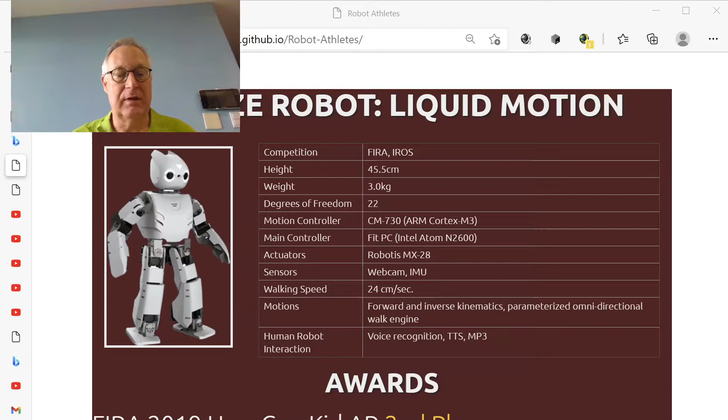And, yes, I should move myself to there. We won second place in the HuroCup all-round competition. I'll go into more detail about that competition and what the robots have to do, in 2019, which was a good success for us. Okay, that's not so good either. Maybe here.

Our next larger sized humanoid robots are the Robinion robots. They're 80 centimeters tall, 7 kilograms, with 26 degrees of freedom. The special thing about those robots is that they use a parallel kinematics design to make the legs lighter, so there are actually no servo motors in the knee joint of the robot. They're placed in the ankle and the hip, but then you have to double them.

These robots won first place at the HuroCup competition and also did well in several other events. We also have a 1.3 meter tall humanoid robot, 12 kilograms with 20 degrees of freedom, which is specifically built for the RoboCup soccer competition.

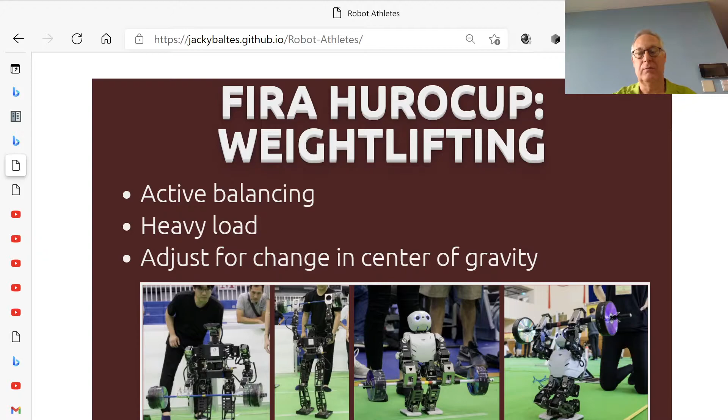One of the events at the FIRA competition is the weightlifting competition. Similar to human weightlifting, the humanoid robot has to carry a heavy load. However, we did not just want to test the shoulder strength, the strength of the shoulder servos in the robots, so it's actually more of a balancing competition.

We have the video here. The robot first needs to walk up to the bar. Now these robots are all real robots. They are fully autonomous, not remote controlled by humans or anything like that.

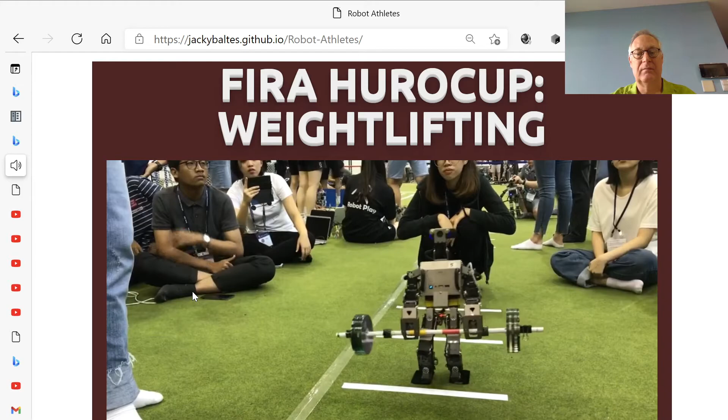Once the robot positions itself so that it is able to pick up the bar, it then needs to walk to the third line from there. Now with one foot touching the line, the robot needs to lift the weight above the head.

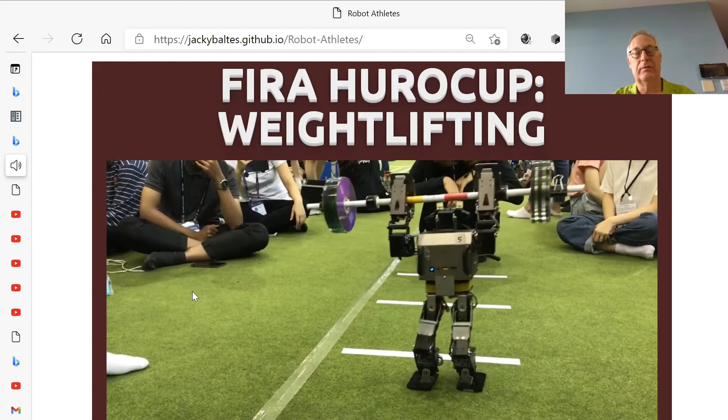This is where the balancing comes into play, because for the first 50 centimeters the center of mass of the robot is very low, so it's a very stable walking gait. Now the robot has to be able to compensate for the shift in the center of mass, so now the COM is much higher, and you can see the walking gait has changed. It needs to be able to compensate for that.

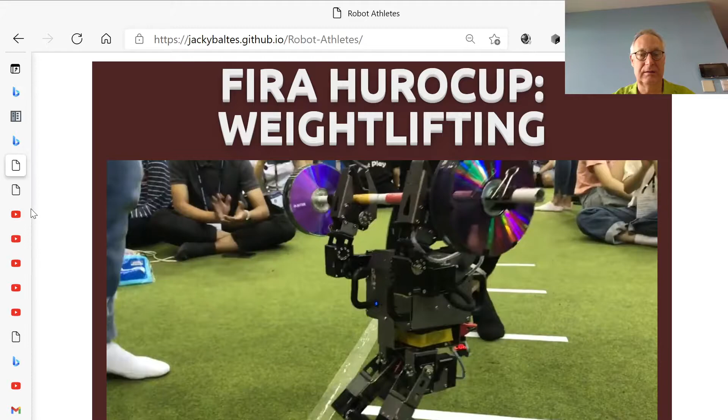Next, the sprint. One of the nice things about using sports is that it's very easy for people to understand the point of a competition. I already talked about the sprint before, and each and every one of you understood that the idea is to run as fast as possible for a short distance. You may not have known whether it's 2 meters or 3 meters, but it was clear there was a short distance. And we can see what capabilities of the robot we're testing in this scenario.

So let's have a look at the sprint. We will start the sprint final in 5, 4, 3, 2, 1. This was the FIRA 2017 competition. One of the robots did a false start, so they had to be pulled back, everybody. So in a sense, it's just like the Olympics - the atmosphere is very electric, people are very nervous.

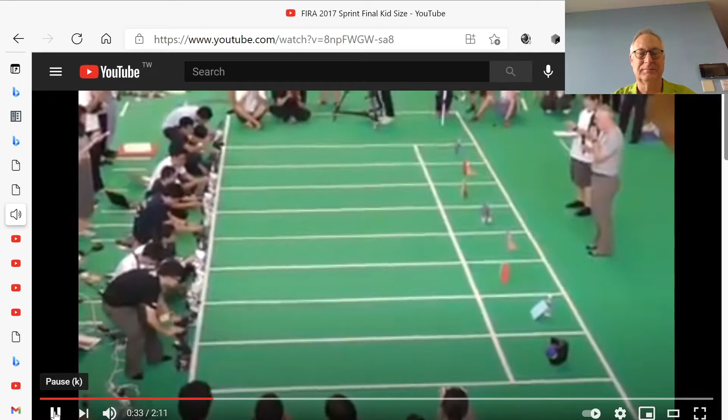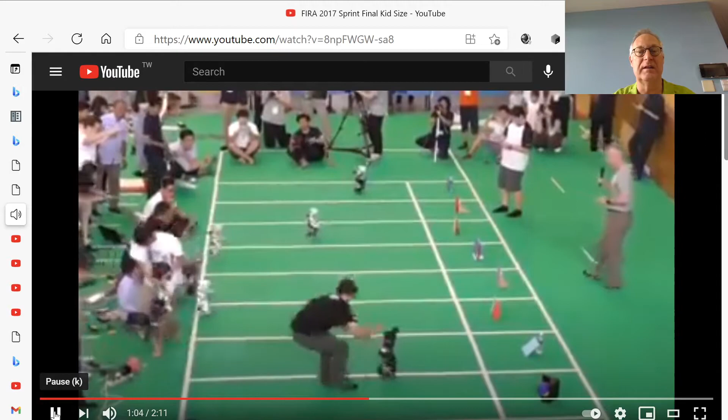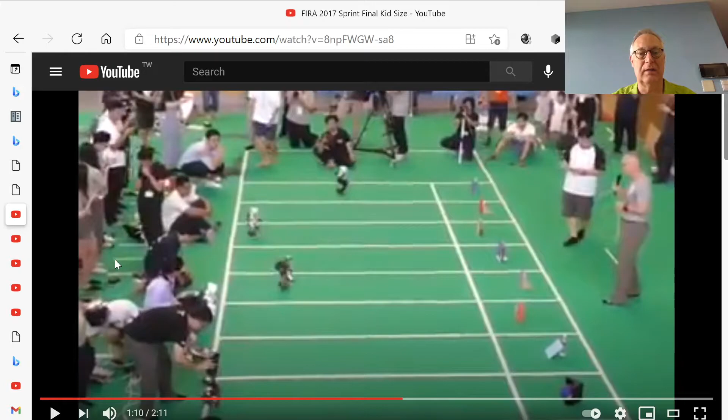Another good thing about using robot sports as competitions is that we can track progress. You see the robots here from 2017. The world record in 2015 was about 52 seconds, and then in 2017 the record is 26 seconds. Even in just 2 years, you can see how much the technology improved, how much faster the robots now are compared to just 2 years ago.

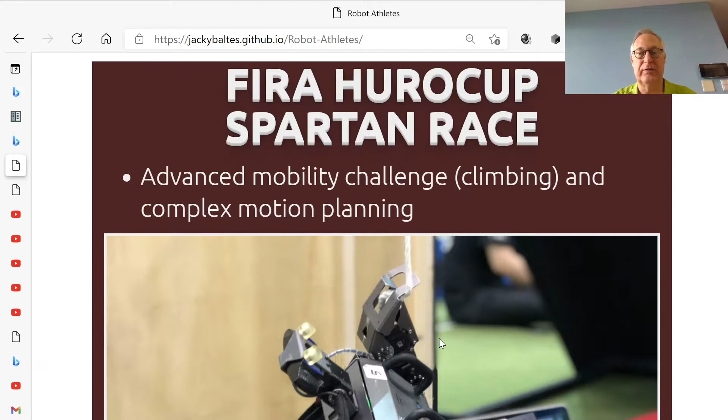We have the Spartan race. This is an extreme mobility challenge where the robot has to climb a rope and climb a ladder, and that challenges the motion planning, because for climbing the ladder, the spacing of the rungs is not fixed, so the robot needs to be able to see where it can reach and which holds are stable, and then plan a path through there. So this is not something that you could pre-compute with a set of parameterized motions, because there's just too many variables.

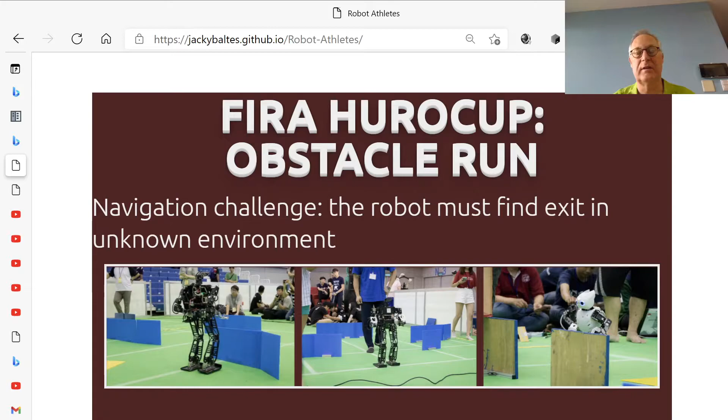The obstacle run is a navigation challenge where the robot needs to find the exit, needs to map its environment and then walk through. The marathon, in contrast to the other robot competitions and the other HuroCup events, is always held outdoors, which makes the vision problem a lot more challenging. The robot has to follow a path which is indicated by the red tape - actually, it can be any color tape.

Also since 2019 there are markers, so there's a right arrow, a left arrow, and a straight ahead arrow. The robot then has to walk for 425 meters, which is exactly 1/100th of the marathon distance. When we started the competition, the distance the robots had to walk was 42 meters, because that's how far they could walk in an hour and a little bit of time. So again, you can see how much the robots improved.

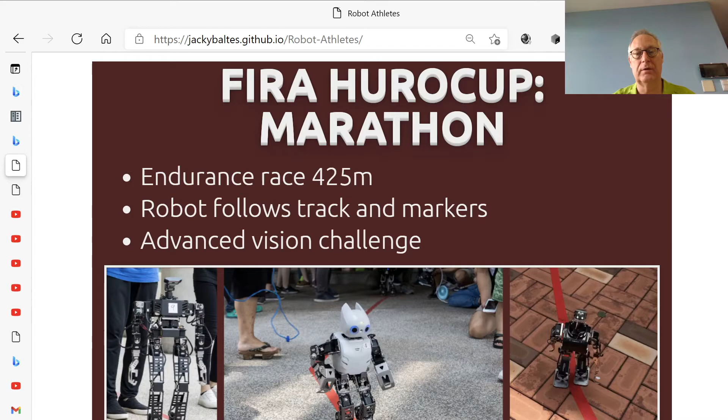We have a triple jump, which is a highly dynamic motion, where the key aspect is being able to synchronize all your motions, so all the joints are using full torque at exactly the right time, and then you need to be able to land.

That's quite an interesting challenge. In particular, when we started it, we built the playing field for a maximum distance we expected of sort of 20 centimeters, so we built it for 50 centimeters. Then one of the teams showed up and jumped 80 centimeters, so they jumped out of the stadium. We had to reconstruct the stadium for the next year.

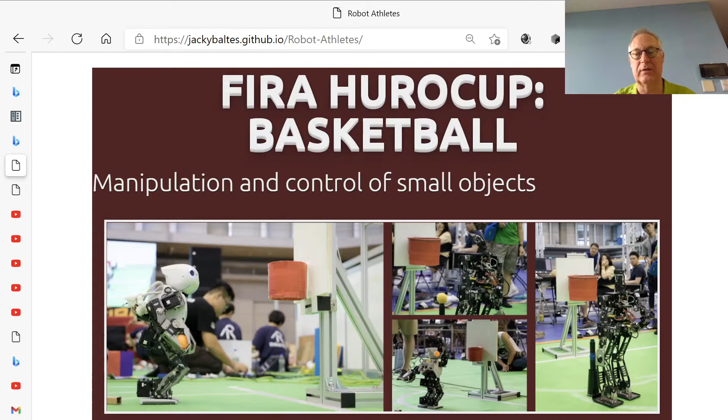Basketball - now it would be really cool to build a robot that can dribble a ball, but that's not really possible with the technology at the moment. So the robots for basketball are mainly dunking and throwing the ball for 3 points, 1 point, or 5 points. There are 3 different circles - how far away you are from the basket determines how many points you score.

Archery - we have a moving target, and the robot has to hit the target. This is actually an interesting problem in motion planning, not because of huge variety of motion, but because of the high precision needed to hit a target.

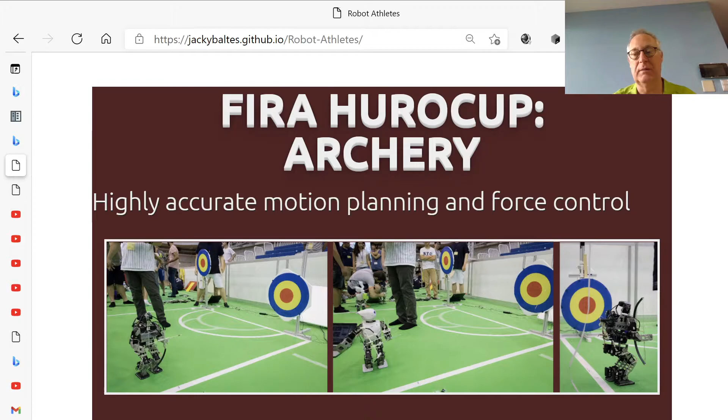With our largest humanoid robot, the Thormang, we are actually trying to qualify for the Taiwan national archery competition and for the Olympics. The goal was 2020, but because of COVID it's now delayed until 2021, and we were slowed down as well, so we hope to compete in an Olympic archery distance event in 2022, next year.

Here's our archery robot shooting 15 meters. Shooting. You can see it's quite accurate there - over 15 meters we are quite accurate.

Mainly it's due to our detection of the target, which is quite stable. We use a histogram of oriented gradients for detecting the target, and then train a classifier using support vector machines in order to classify targets.

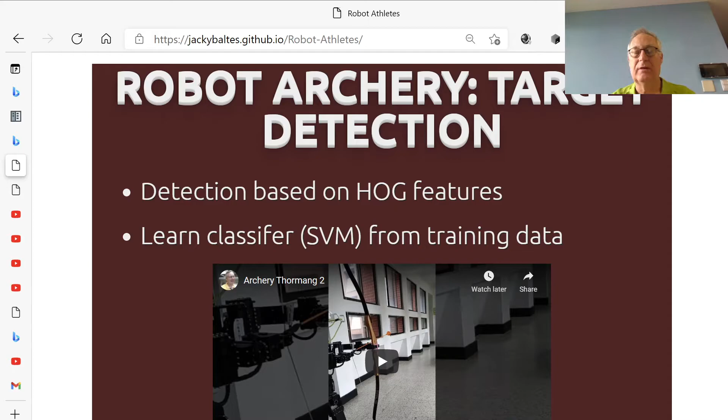Now, the sports events as a quantitative evaluation of robot performance are very good. For human-robot interaction, however, it's hard to come up with a quantitative measurement.

Since 2017, I've thought that a lot of AI research hasn't focused enough on attention, because attention is crucial to human intelligence. For example, deep learning systems at the moment look at the image as one shot, and then we expect it to spit out everything in the image - whether there is a cat in the image or not. But human visual perception doesn't work like that at all.

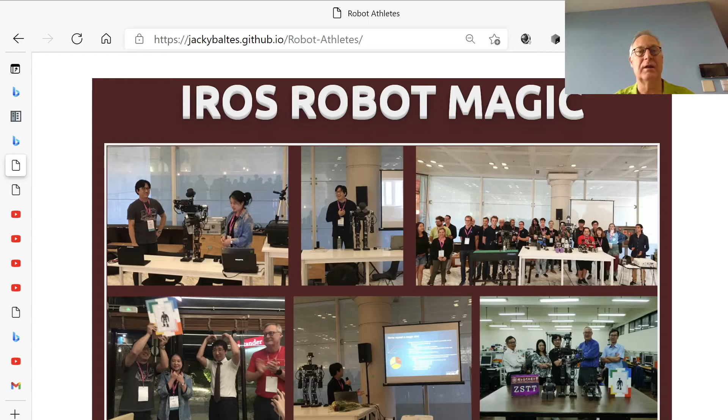So we came up with the idea of the Robot Magic Show, which we usually hold during IROS conference, the largest robot conference for researchers. I like magic as a testbed for human-robot interaction, but also because magic is all about misdirection of attention, right? I want you to look here, and this is where the trick happens.

So here are two of my favorite magic tricks with our robots.

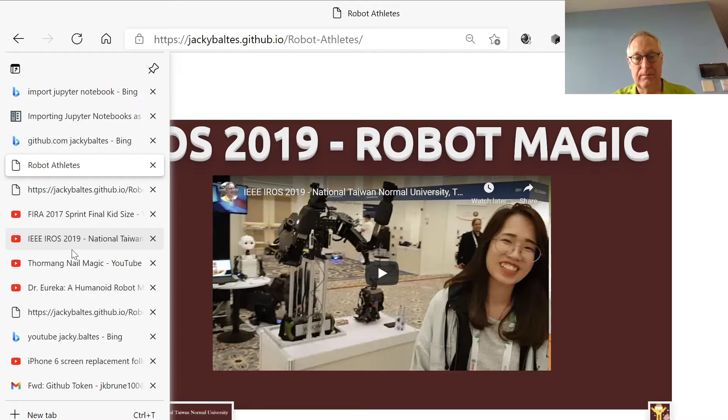So this is a nice psychological trick. The robot gives a coin to the spectator. The spectator has to put the coin behind their back and then put it in either the right hand or the left hand. Then the robot asks you and tries to guess whether the coin is in the right hand or the left hand.

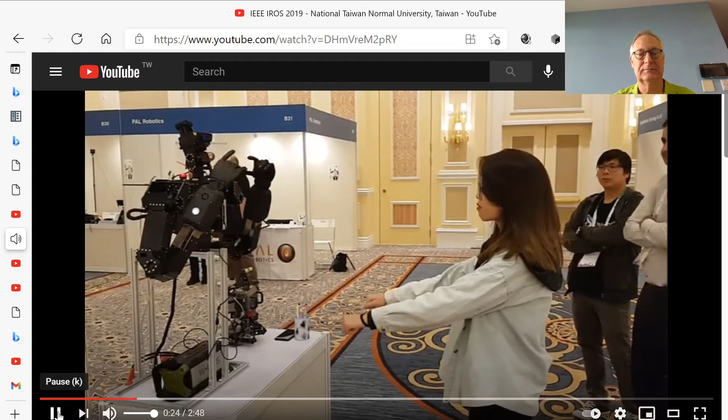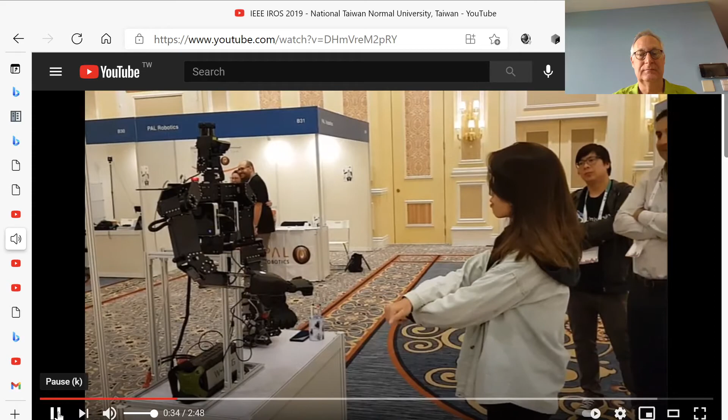So this is actually the part where the trick happens. The robot is trying to look for cues. Some people claim that you twist your head slightly in the direction of where the coin is not, or that your eyes flicker. Those will be very difficult to detect using the webcam that we have mounted on the robot.

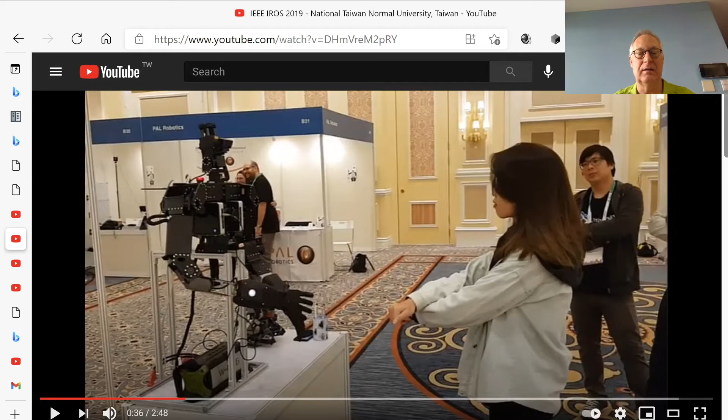And even though we're training on that, if these hints are not conclusive, then the robot is asking you to cross your arms. For most people, we're more than 80% accurate with this: if you ask them to cross their arms, then the coin is in the arm that is below. People are trying to hide the coin subconsciously.

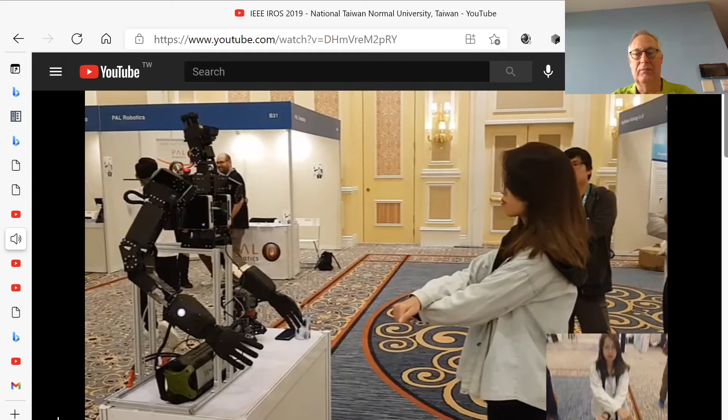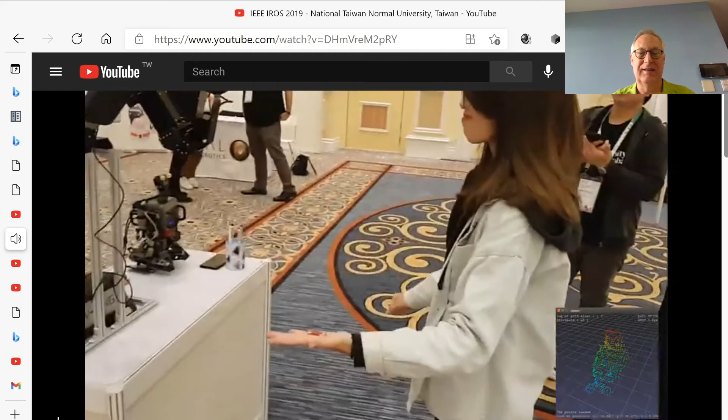Now, being able to detect which arm is on top is easy for humans, but we tried it for about 6 months and it's actually quite a hard problem. So we finally ended up using the laser scanner. We wish we could have just used the camera itself, and we're still doing research trying to improve detection using the camera.

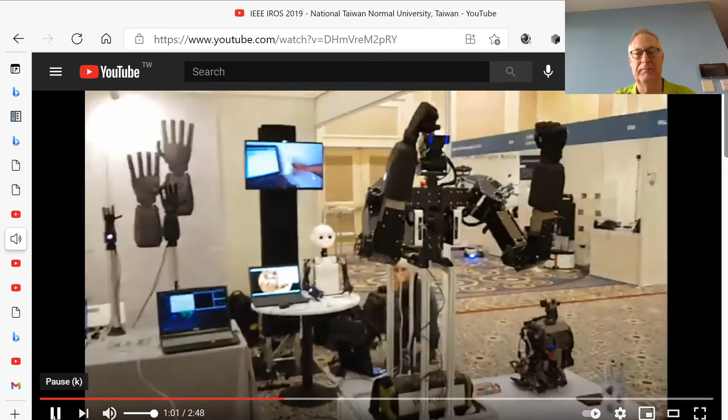Now you can see here the output of the LiDAR scanner and what the robot actually predicted. So here's the point cloud of the person. And here's the same trick during the official competition. Put it behind your back and hide.

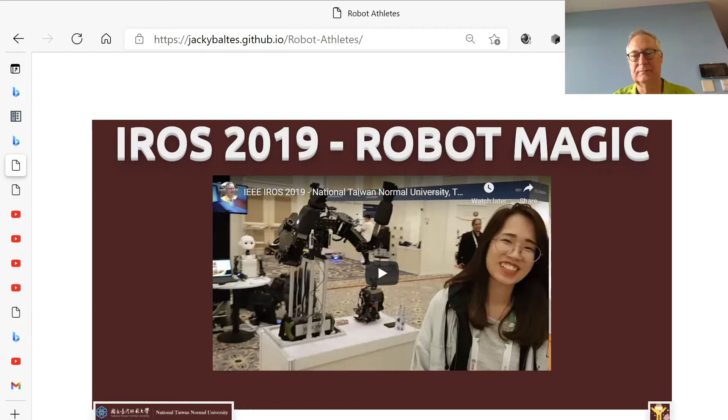I also like the next trick, which is a nail trick, so it's more dangerous if we do it wrong. I, in particular, would be injured. So there's this extra element of danger. The trick includes some comedy, since I assume most of you are able to speak Chinese, you'll be able to understand it. But the whole trick is sort of based on the fact that I'm unable to speak Chinese.

So we're pretending that the students are trying to trick me.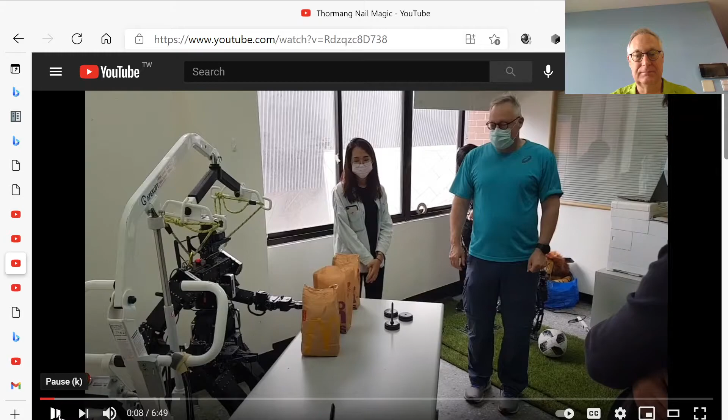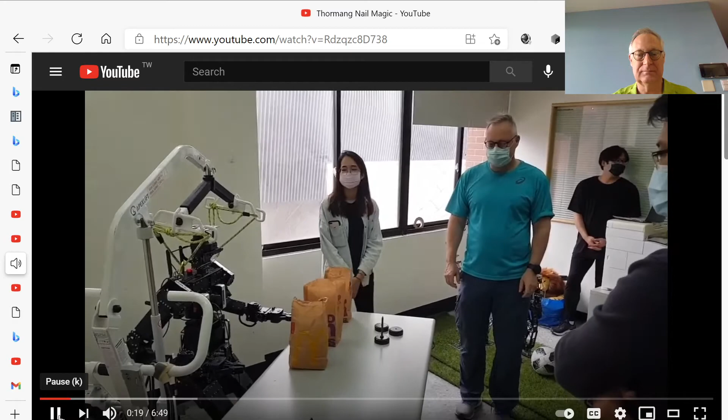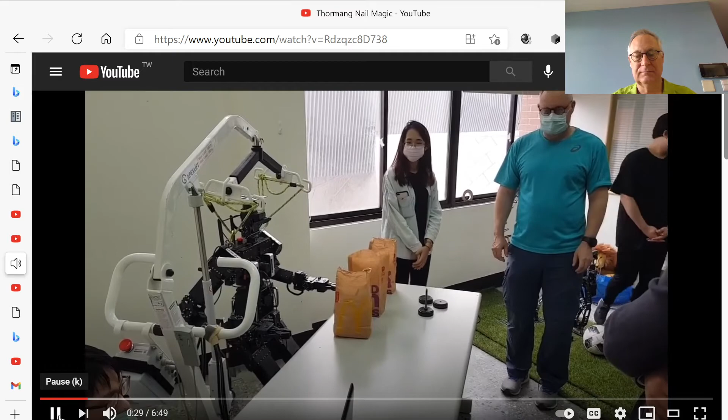Welcome everyone, I am Thormang. Today I am going to show you a magic trick that I have learned recently. As you can see, there are 3 paper bags in front of me. Later, I will put this wooden base with a sharp nail into one of the paper bags, and then swap around the position of the bags.

To make sure we won't find out the bag is empty by feeling the weight, I prepared 2 wooden bases without nails. Student, please help me put these 2 wooden bases into 2 paper bags and close them.

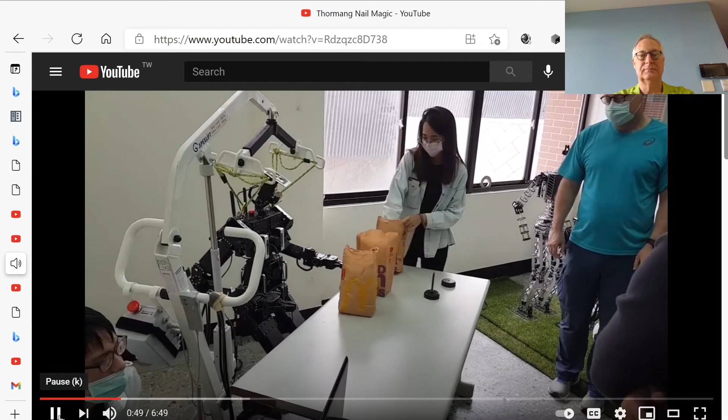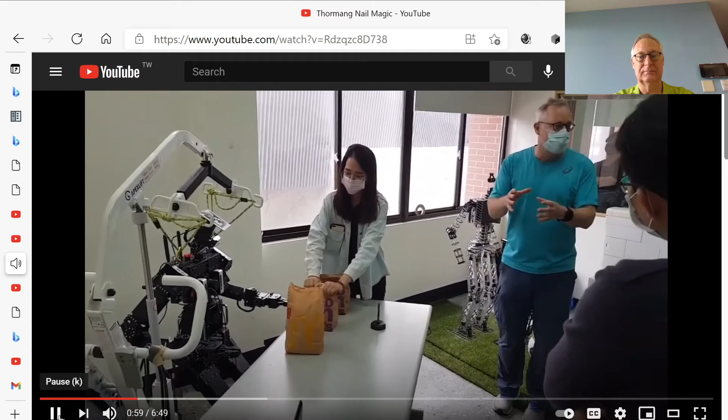So our research goal here is detection and manipulation of soft, deformable objects, because the paper bag is not solid, so you cannot just squeeze it.

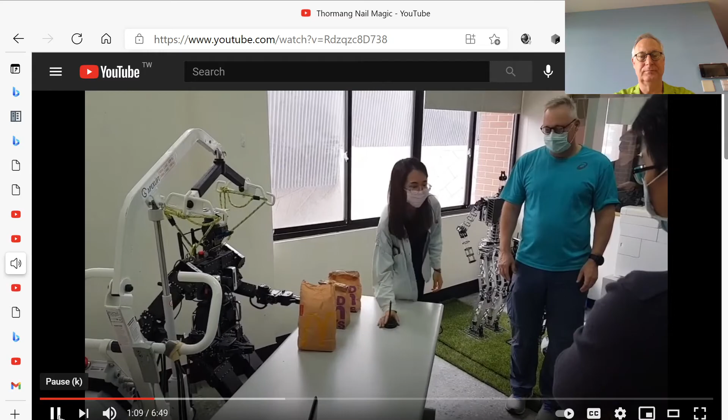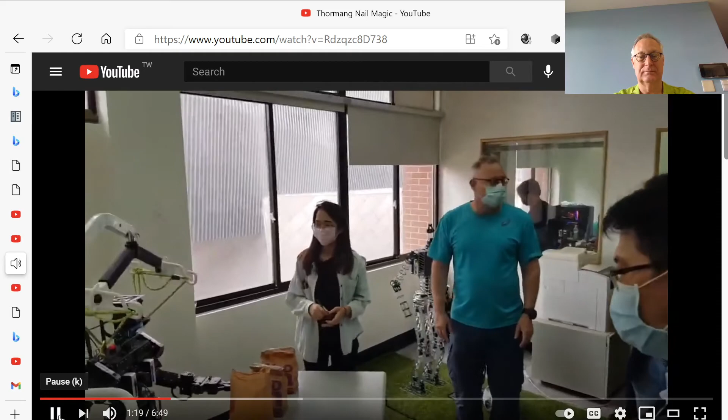Student, please ask an audience member to examine the nail and make sure it is real. Now you can check. So, audience volunteer, can you confirm to the rest of the audience that the nail is indeed real? Okay, thank you.

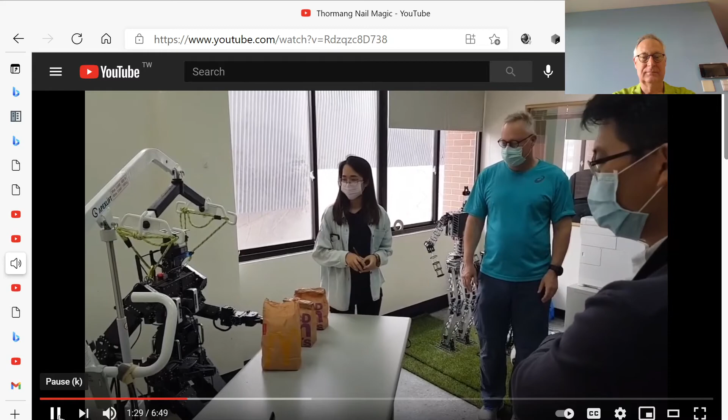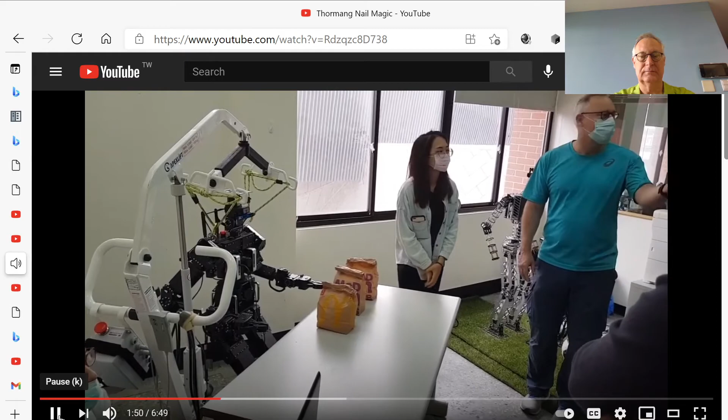Student, please place the nail inside the last bag and close it. And everyone, please pay attention and remember which bag contains the nail. Now, I need another volunteer. Any volunteer? Thank you for volunteering.

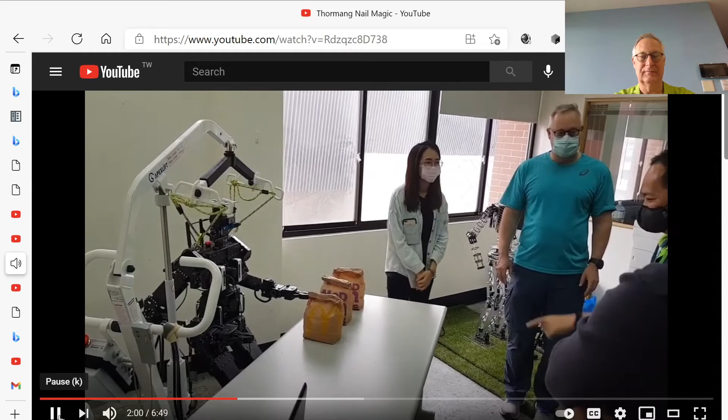Now, do you remember which bag contains the nail? So this is important now. So the bag with the nail is the middle bag, right?

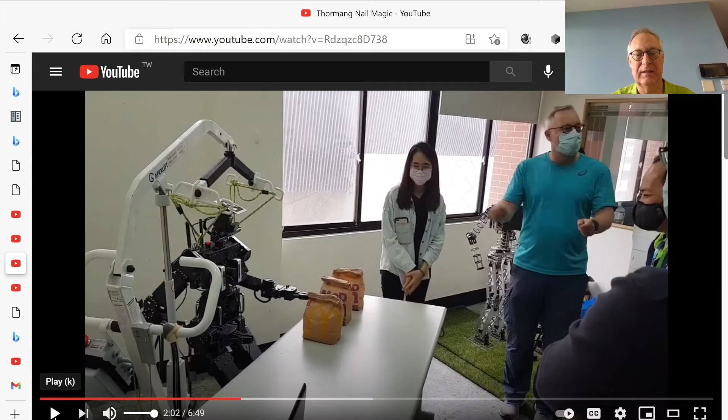We're going to shuffle them, but the robot, because it has very fine vision, it can detect where the bag is basically.

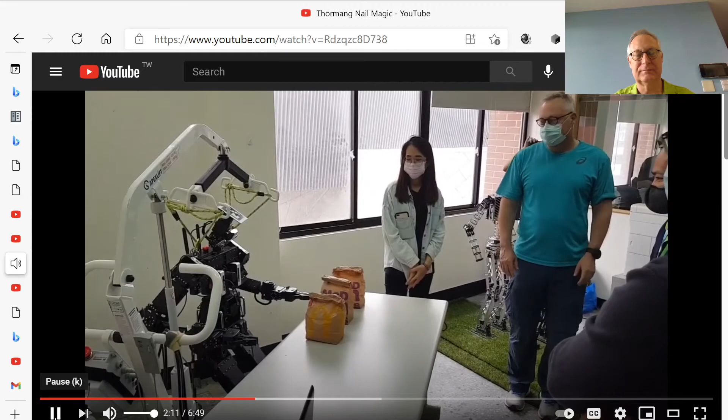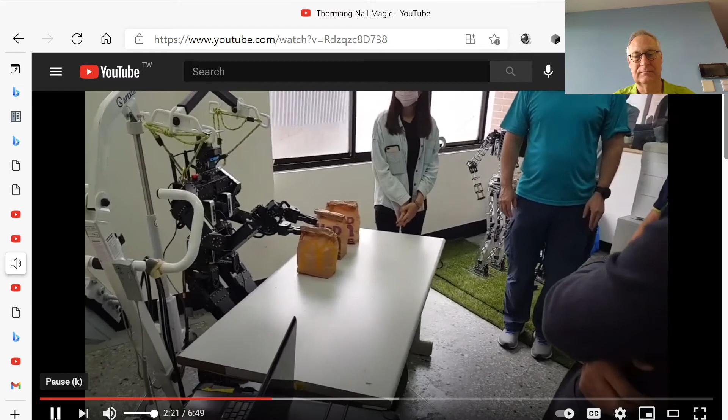You mean this one, right? To make sure that I won't be able to know which bag contains the nail, the student will start swapping the bags around. When I say start, the student will begin and volunteer, you can shout out stop any time you want. So you just need to say stop. Let's start. Stop.

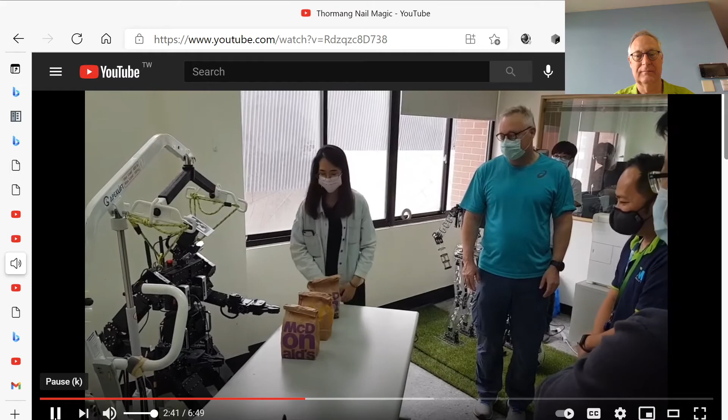Okay, now I need some time to feel where the nail is.

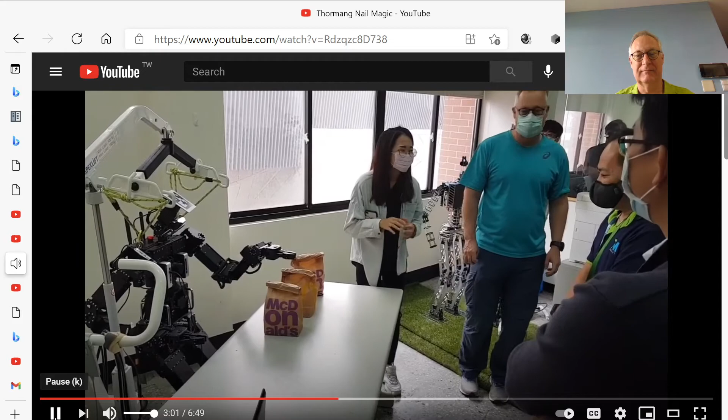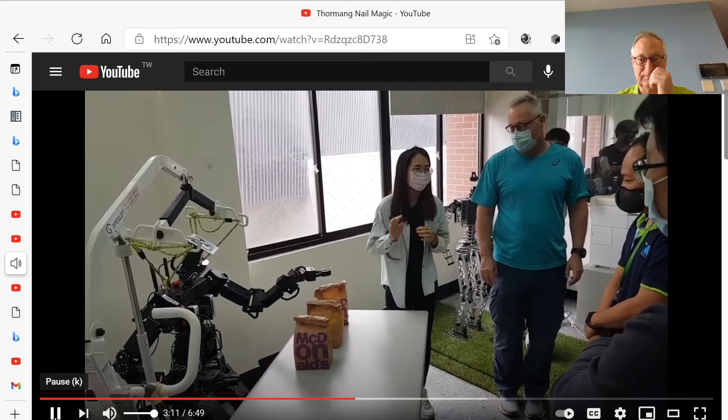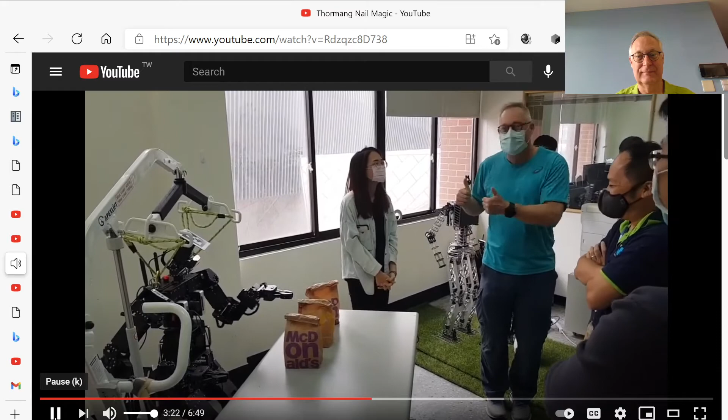Everything okay? Oh, I am 100% sure where the nail is.

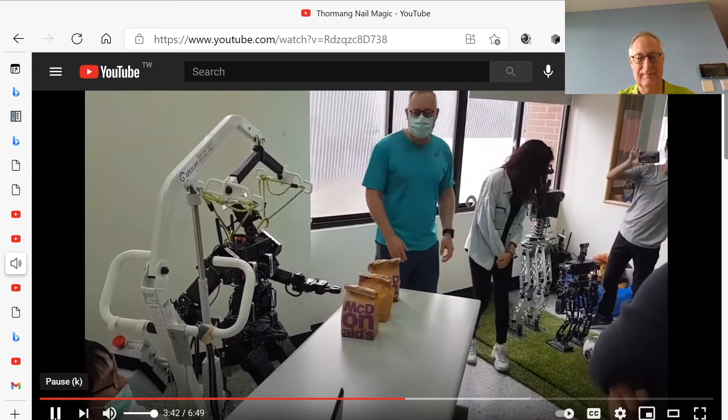So I would like to play something much more interesting. Jackie, as the supervisor of your lab, do you believe in my talent and your students' ability? Not so much my students' ability, but their hope to graduate, I think. Oh, I am happy to hear that.

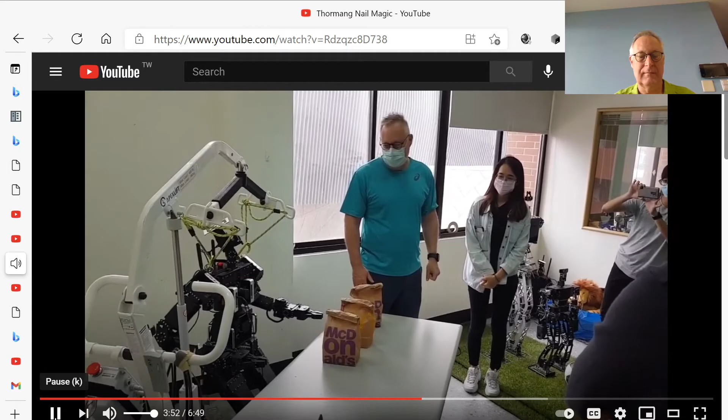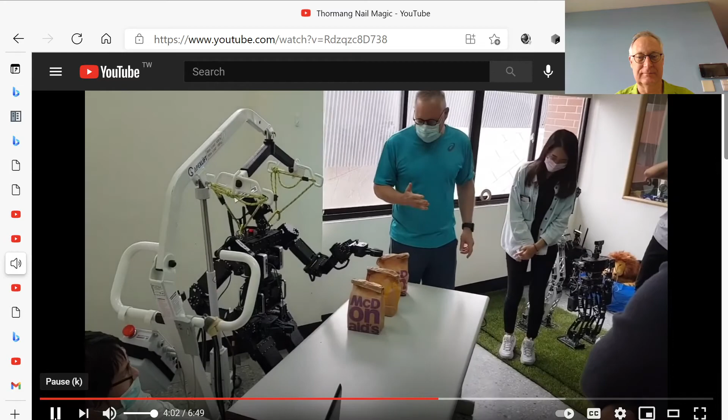Since you trust us so much, we can raise the stakes. How about we use your hand to press down on the paper bag? What? I'm not so sure about that. It was supposed to be Green's hand, not my hand. Please give me your hand, Jackie. Okay.

Volunteer, choose a bag you think there's no nail inside. Left, right, or middle. Choose wisely.

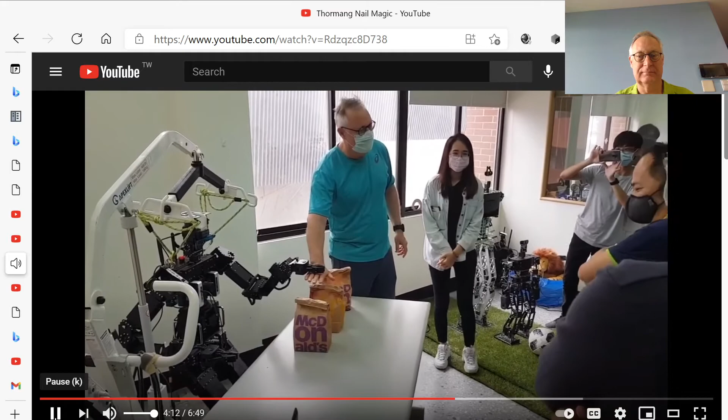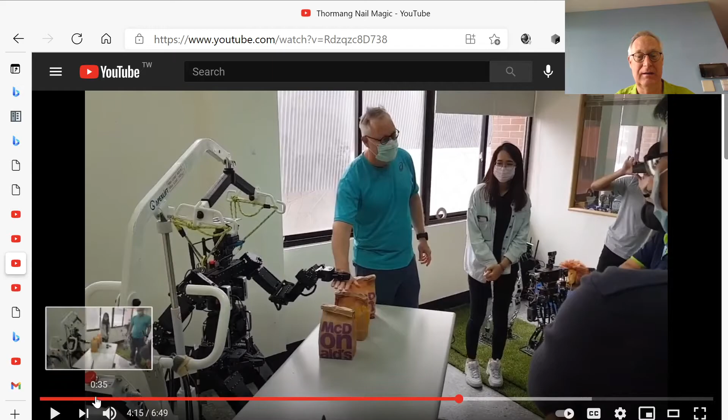So now they basically suggested that people should not use the middle bag, right? You want our professor to get hurt, right? Left.

Okay, left. So that volunteer was nice, he didn't want to destroy my hand. Okay, you sure about this?

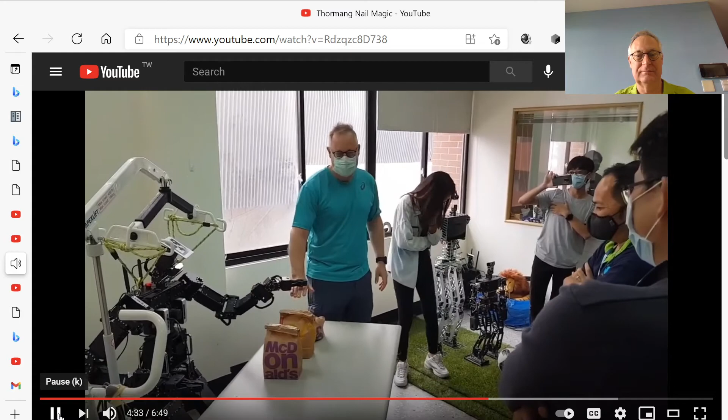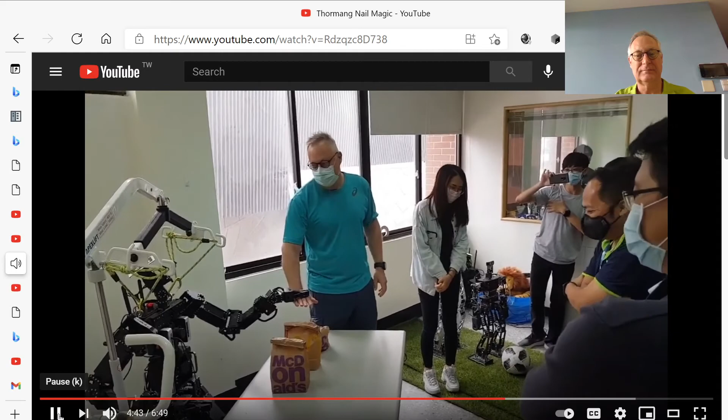Jackie, don't be a bit nervous, don't you trust me? I am the only hope of graduation for your students. They won't disappoint you, trust me.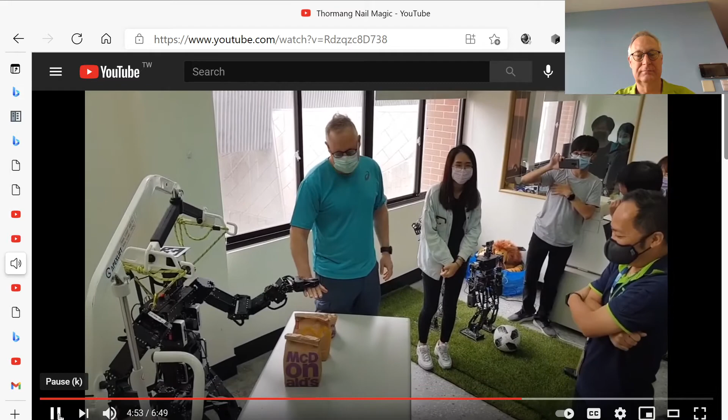Hey volunteer, what's your next choice? Left or right? Right. Okay, right. Yeah, because everybody thinks the nail is in...

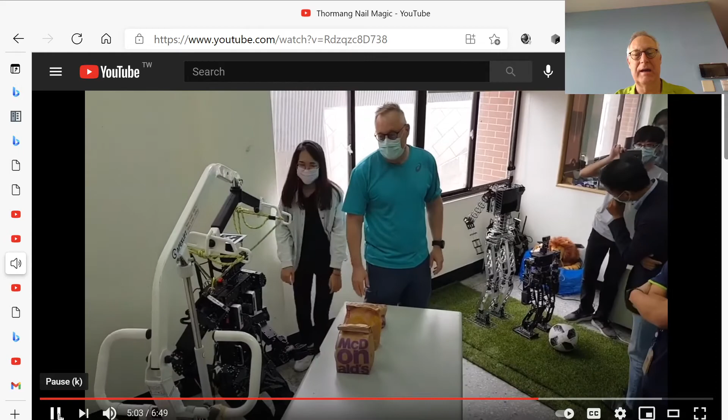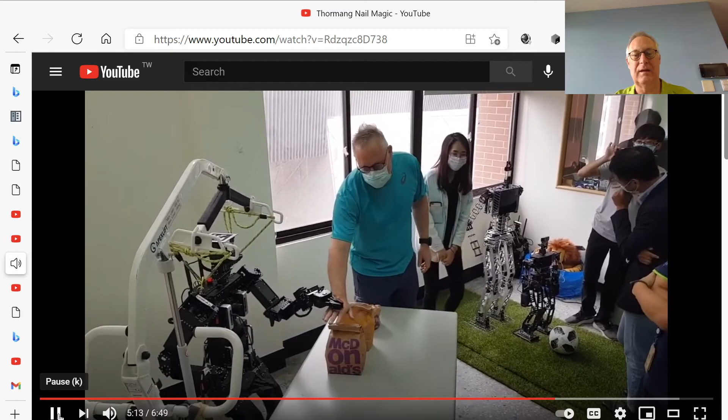What just happened? It's in the middle bag. Finished rebooting. Okay, so now we think that there's an error in the robot, but I think this one is safe.

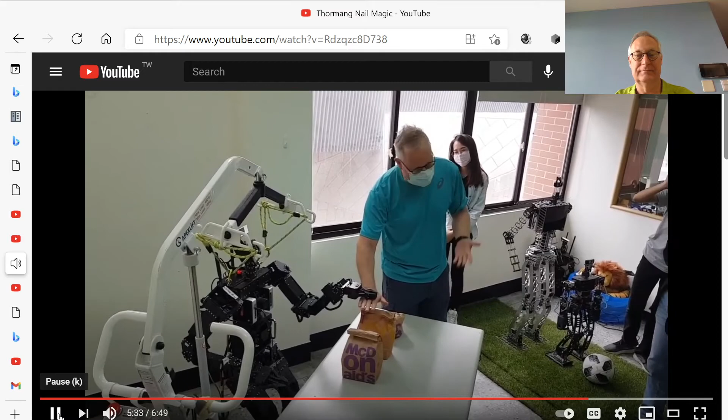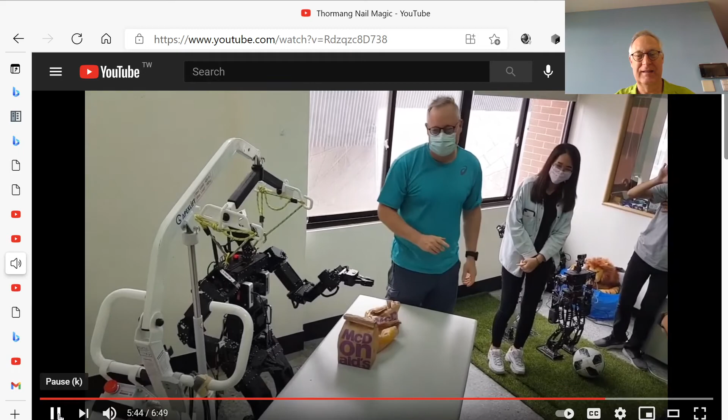So now the audience... we forgot to put the cap on, that's the problem. Yeah, got you. Ha ha ha, don't be that scared.

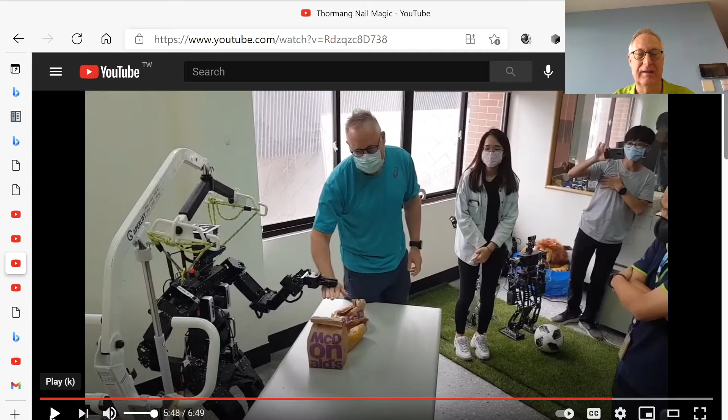So now the audience expected me to be injured. I'm disappointed nobody tried to stop it. But the nail, they all saw the nail go into the middle bag, and now magically the nail jumped to the other bag.

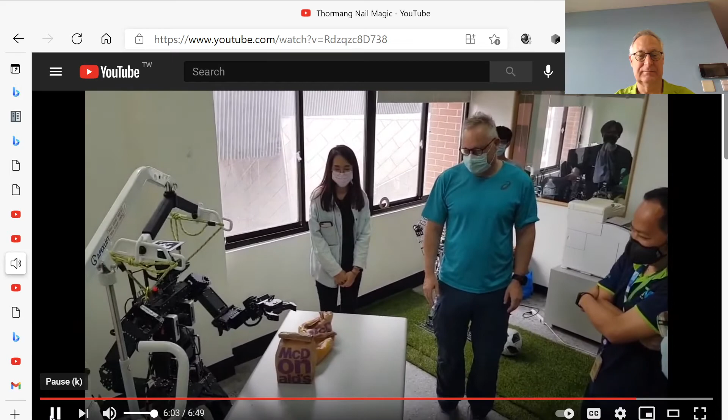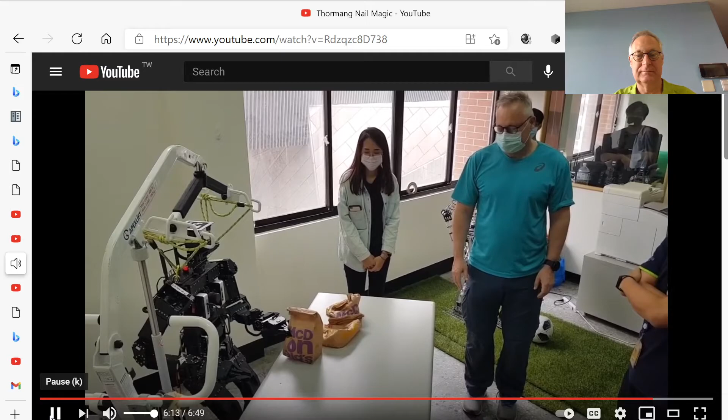So you might be really curious where the actual nail is, right? Jackie, please help me check what is in the bag. So you can check.

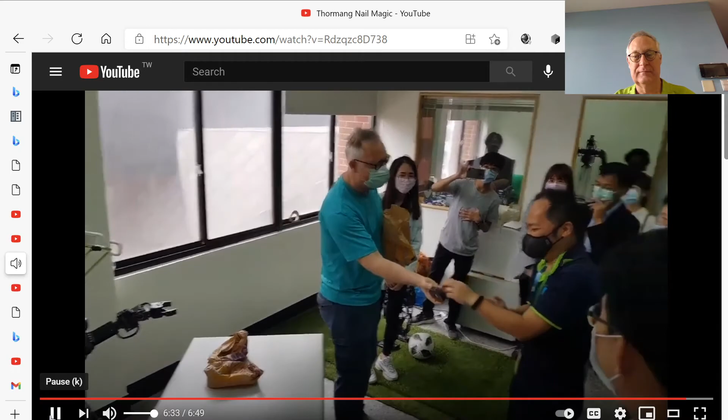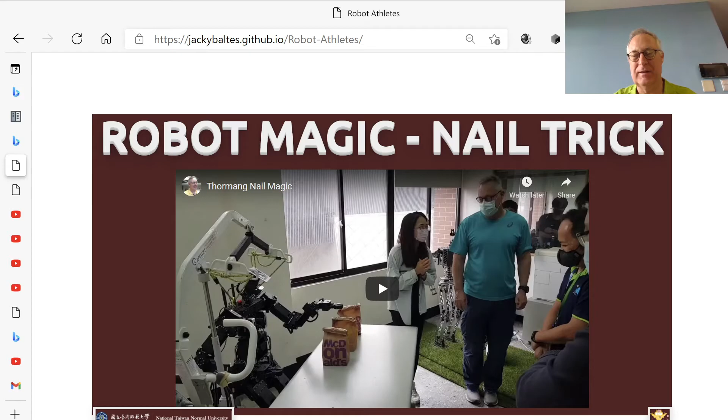So this is a very fun magic trick, especially because we can play it in Taiwan, because people there speak Chinese. People here speak Chinese too, yes.

So I'm gonna move a little bit quicker. We also have another human-robot interaction problem where we're playing a game of Dr. Eureka against other humans, other players.

I want to finish off by talking about our Gogoro scooter project. This project's goal is for the Thormang robot to be able to learn how to drive an electric scooter and to be able to pass the Taiwan driver's license test for scooters.

And that would be pretty cool because it'd be the first time that an autonomous system would pass a driver's license test like that. At the moment we just started the project, so one of the problems we have is making sure our control is accurate enough and fast enough to balance the scooter, because driving on two wheels, similar to walking on two legs, is much harder than driving on four wheels or walking on four legs.

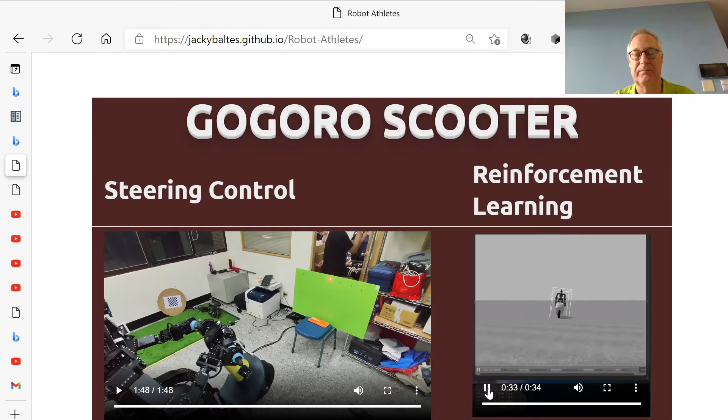We also implemented a simulation of our robot in the NVIDIA Isaac Gym for reinforcement learning, and we trained the system in order to learn how to control the scooter given different perturbations. So I'm not sure if we have this video, but we also throw boxes at the simulated scooter while it's driving in order to make sure that the control is robust.

Now for the scooter, we also have designed a simulator and a simulator game that we want to play during the FIRA 2021 social distancing edition. So we have our simulated robot driving in an environment that matches the Taiwan scooter driver's license test.

This is a first prototype with just the ground plane. So you have to do a hook turn here and then change lanes and then do a 180-degree turn, and then there's a stop sign that we just blow through, and then this will be the end.

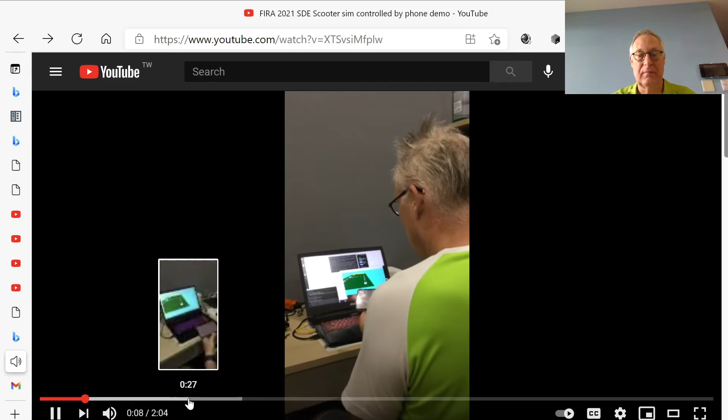Just yesterday I finished this. Last time I showed you the app that I wrote that we use in order to control the scooter, the real Thormang on the real scooter. So this is an app I wrote where now we can control the steering angle for tests on the real robot.

But now I also changed it so that we can run it on the simulator. So now you can see you can use the Flutter app to control the scooter in the browser. This is done by running a WebSocket client, which gives us a TCP/IP connection and a broadcast server written in Python.

So now you can see, a little hard to see, but there's a traffic light there, so I had to wait for the light to turn green. Then I can progress. I cheated a little bit because I made it very slow so that I have a chance. This first part is the slow driving part of the scooter driver's test. You have to drive 15 meters in a 30 centimeter track, and it has to take you more than 7 seconds. Between this and what my students tell me, this is the hardest part of the scooter driving test. But I think that we should probably re-implement it.

So if you're interested in that kind of research, the kind of systems that we developed, I didn't go into the technical details, but we use histogram of oriented gradients in order to track our targets in archery. Our latest system actually uses deep learning, so we also keep improving them, but that is not as robust for all different kinds of targets. The problem is not so much the deep learning network, but the fact that we just don't have enough training data for training the deep learning network on all the different archery targets it may be asked to recognize.